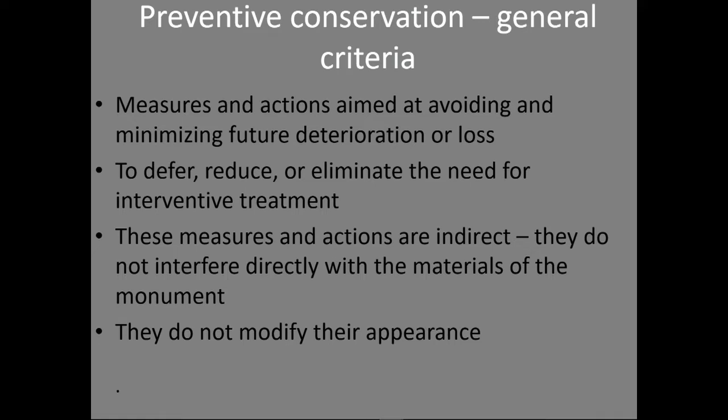As a subset of overall conservation, we also have preventive conservation. What are the main general criteria for it? We can summarize this as measures and actions aimed at avoiding and minimizing future deterioration or loss, to defer, reduce, or eliminate the need for interventive treatment. These measures and actions are indirect - they don't set out to interfere directly with the materials of the monument, and they're not meant to modify their appearance, but we'll talk about that in due course.

There's a lot of preventive conservation in museums, but if we take it outside to an external monument, it seems to me there are 2 main things we're requiring of preventive conservation: preventing the ingress of moisture or the formation of salts, both of which can be potentially damaging and may be interlinked, or modifying or controlling the environment of the monument to mitigate the causes of decay. So we're now narrowing it down to just these couple of issues.

Preventive conservation is understood to be carried out without intervening with the stone itself, right? So the control can be considered as reversible, although the effect on the stone may not be.

Giorgio Torraca, the much missed Giorgio Torraca, in his lectures on porous building materials, said that any consideration of protection should always start with reference to those parts - roof, gutters, downpipes, cornices, windowsills, flashings, projecting elements, damp-proof membranes, drains - that were designed to protect against water and which may not be functioning properly because of their own deterioration or defective design. Giorgio wrote a lot of common sense, and this is one of the best paragraphs he wrote, in my opinion, because it's so important.

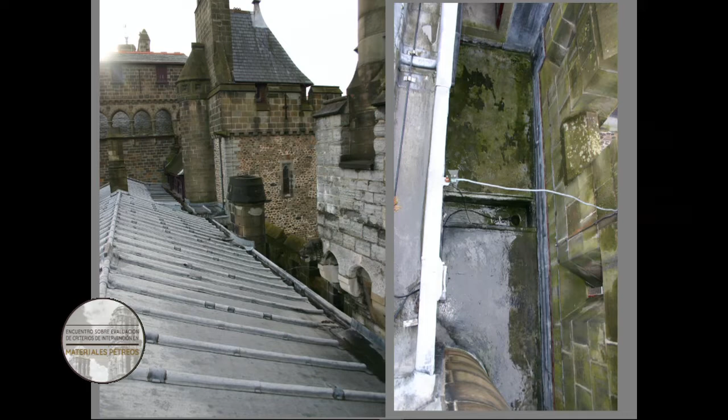This is Cardiff Castle in Wales, with massive expanses of lead roofs. That's fine, and you think that's all terrific. But when you realize that every single piece of roof you can see, including all this up here, is all draining into one gutter here.

Not surprisingly, it's coming out of this spout, and when it rains there's rather a lot of water coming out. Its control is non-existent, and it will splash over the masonry. It gets in through the window, through the flashing, and it's running down the wall.

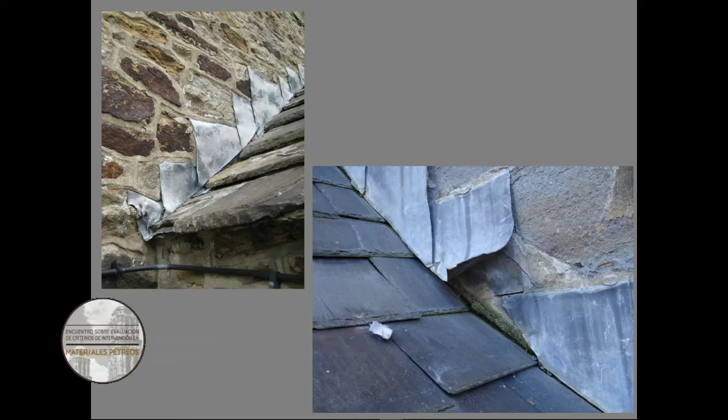So the management of rainwater has got as far as the roof being efficient, but the next step is no longer working. We have lead flashings, which try to protect the interface between a roof and a piece of masonry. Self-evidently, that's a weakness in any system, but we need to make sure it's working effectively.

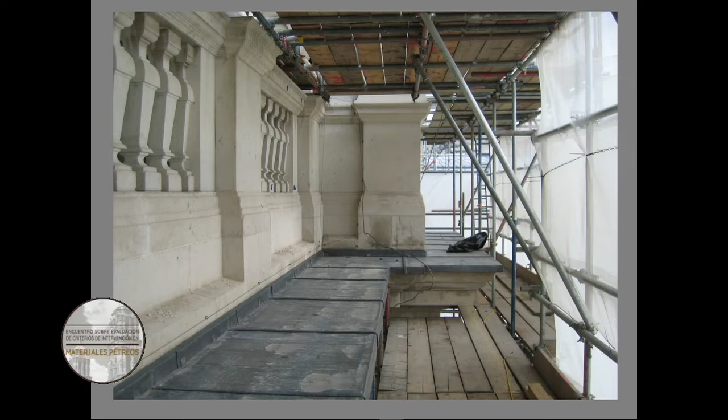And cornices, which are designed as weatherings, are designed to protect the stone beneath and throw water clear. In that design, they basically rely on a little throat normally underneath which throws the water clear. The moment that erodes or doesn't work properly, the water will just track back onto the stone. So we introduce protection of cornices like this.

That's fine until somebody puts a ladder against it to put up the Christmas decorations, and you can see that's pushed the lead back against the stone, and now the water is beginning to track down the cornice.

So these are just some of the issues you see in terms of these things that Torraca talked about. We have

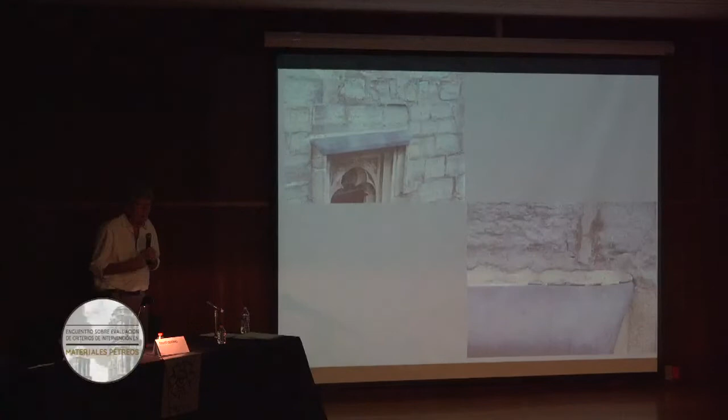windows with pointing between lead and stone. Very difficult, they have very different thermal characteristics. Lead expands a lot when heated, stone doesn't, not much anyway. So any mortars there will crack, and the moment you have a crack, capillary action means the water will start to come in.

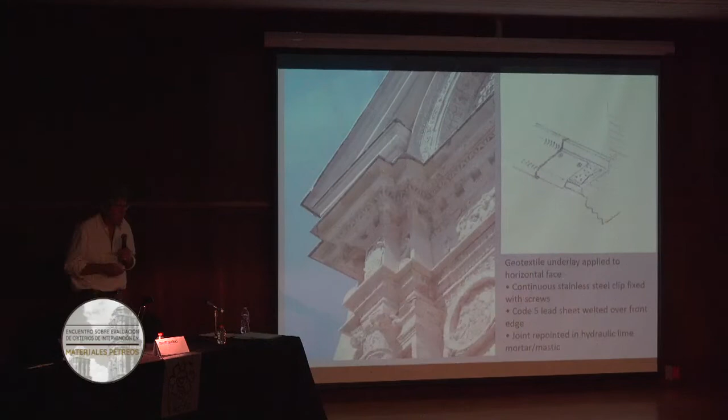And a cornice protection to cornice can also, of course, be an effective repair strategy for failing stonework.

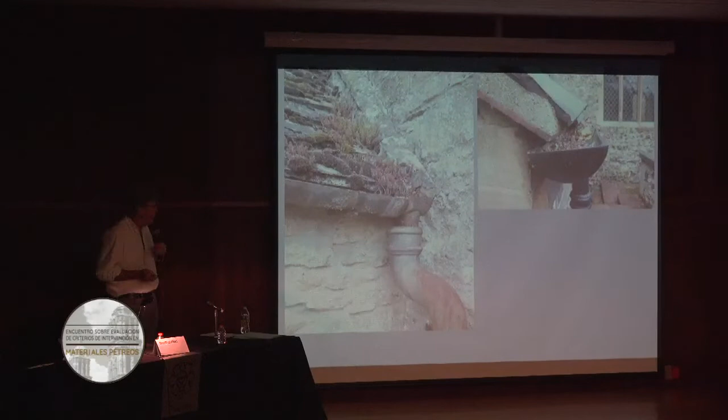Again, wherever you go, you will see things blocking it, from dead birds to vegetation to all sorts. This is my favorite: the water comes down here, somehow it's meant to leak from there into that gutter, down there, and then down there. It's no surprise that doesn't work very well.

This is on a very important church. How did we get there? How did it possibly happen that we could construct something so complex and useless?

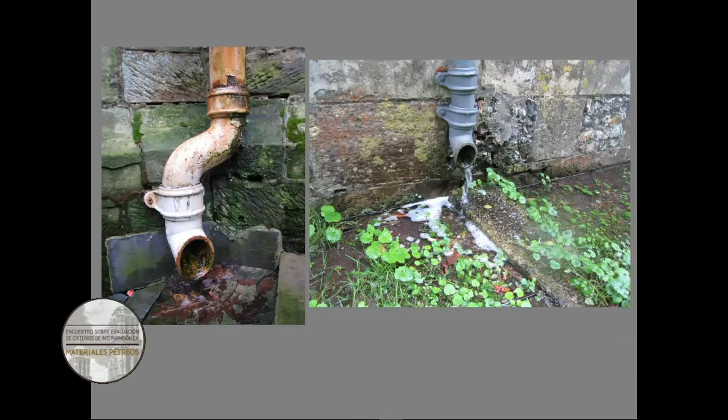When we get water down to the bottom, we want to dispose of it in an organized way, so we want it to go into a nice drain. Unfortunately, the water falls well away from the channel, so it just seeps back into the wall, and on the inside you start to see the results of water not being properly channeled, and you get salts, and then deterioration, and so on.

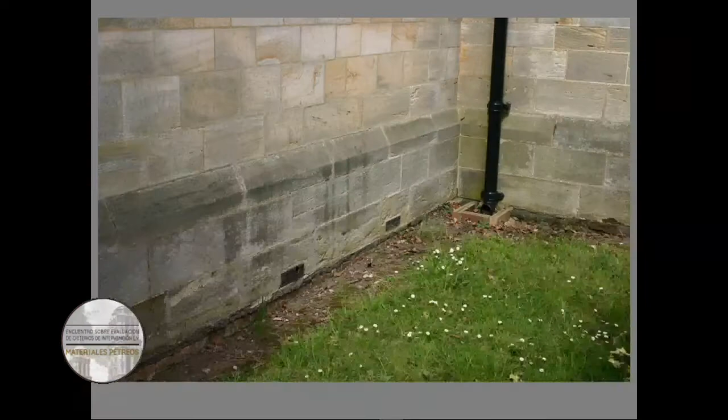This whole scheme happens, and it's all because of something so simple which we could put right. This is actually a very early example - there is a slate damp-proof membrane installed in the 19th century there.

So if you've got damp-proof membranes, they need to work, but they probably don't need to be within 20 millimeters of the surface of the stone, because water will splash above them. All of these things feel so simple, but it's really effective conservation, and we shouldn't be too proud to actually be looking at these things.

Because then when we get salts, we get the problems we all know about. It was good to hear Claudia's description of the problem of salts - they're everywhere. Wherever you go, and poor old Venice again - I'm sorry to keep harping on about Venice, but I want to cry about what's been happening.

Anyway, we've tried to reduce the moisture, we're trying to control the moisture. We can't stop it raining, but we've got to ensure that existing measures are working properly. It's really simple, but it's so important.

So we could reach for additional protective measures, perhaps shelters. When I say managing the external environment, I don't mean that we're controlling the rainfall. What we're doing is things like - trees can affect things, as we showed with the War Memorial earlier, which went green very quickly because of trees above it. Or indirect rainfall, where, as with Cardiff Castle, water is coming from one place and affecting something else.

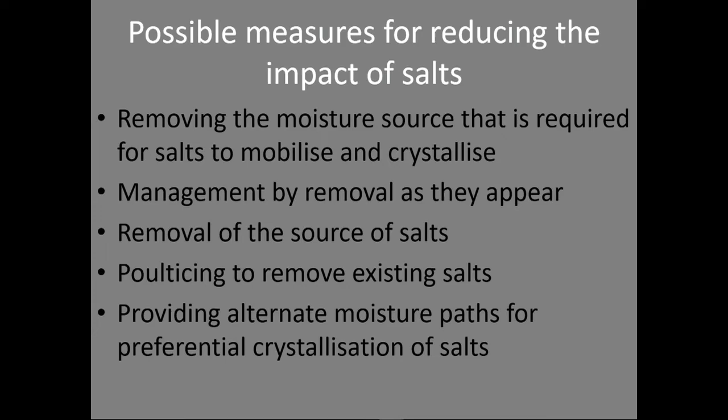So now they have a process where every few weeks they go around and remove the salts from the surface. Removal of the source of salts - quite difficult, but possible. Poulticing to remove existing salts, and providing alternate moisture paths for preferential crystallization of salts. We'll see some examples of all that.

So how do we assess these things and how well they've worked? These are the questions we should be asking - how do we assess it? What criteria are we using to see if it's been successful or not? We'll have a look at that in a minute.

Do we do enough to understand how any change will affect the equilibrium the monument has with its environment? Because everything is about that equilibrium that exists. And can we ensure that the fundamental concept of 'do no harm' is not being compromised? I have examples of shelters designed and constructed for the best possible reasons, but they've actually led to more problems than the ones they've saved.

So each monument is distinct, and there's no consensus really as to what parameters should be used to measure success, as we like to call it.

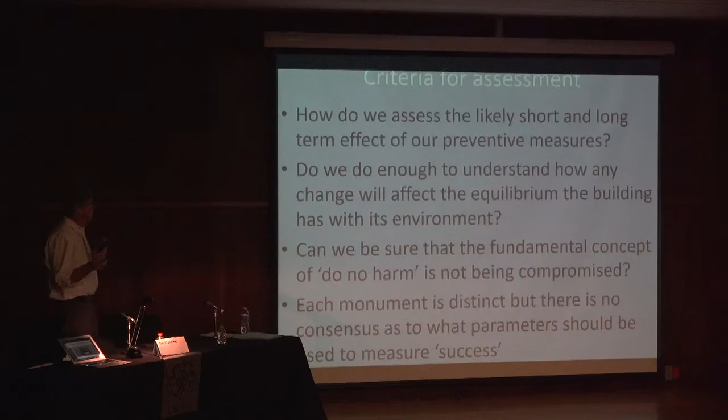So just a few pictures of shelters I've come across over the years. This is in Sri Lanka, and there's actually a painting on the inside of this wall. This is a shelter, and I thought, well, actually that's pretty good, really - it allows the wind through, protects it from the rain, and doesn't make an enclosed space too much. I have no idea whether it works or not, but I took the picture.

This is in Ostia Antica in Rome, where the shelter that's been put up here has clearly contributed to this level of salts. I don't know what it was like before the shelter, but it's certainly no better now, and they've got a salt problem.

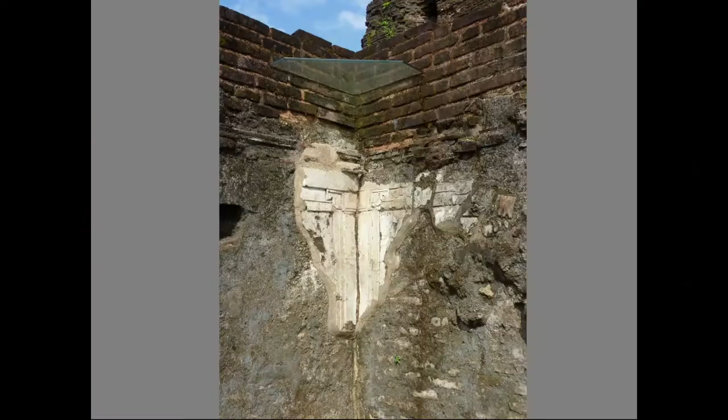This is a good shelter. This little bit of glass up here is to protect that little bit of plaster. I'm sure it's terribly effective, but again, I don't know how you possibly measure whether that's doing any good or not. And then you have the enormous shelter over a Buddha, again in Sri Lanka.

And again, probably protecting it from direct rainfall, which we hope is beneficial. But maybe it's been used to being wet, and now it's dry. What are the implications of that?

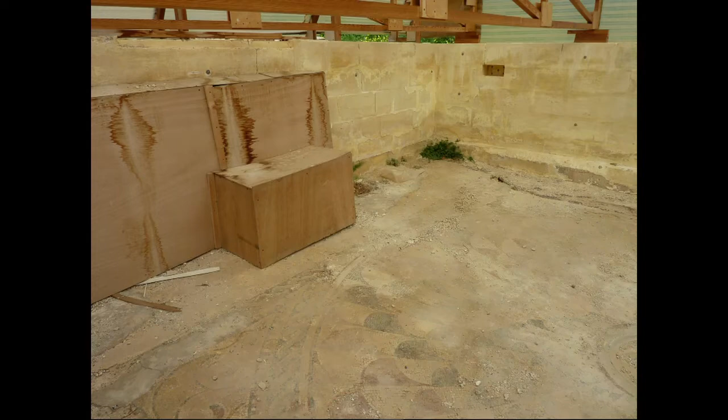So they protected it not only with the plastic, but also with boxes on top. It's no surprise that, this is with the boxes removed, you have these sort of little benches and stuff. They are failing catastrophically from salts, because you've got groundwater and a very hot environment. So groundwater is just being soaked up into them and bringing with it salts. And that's just a close-up of that.

So now let's look at some of these examples. We have the Roman bathhouse in London. For each one, I'll give a very brief history and hope that you can picture a bit what it's like. So this is a 3rd century house that was excavated in 1848. It consists of stone and tile walls with pilae and tesserae.

The River Thames is less than 50 meters away, so groundwater levels vary very considerably. It suffers from significant salt crystallization, especially in the porous materials like the tiles. And it's set within a basement of an office block.

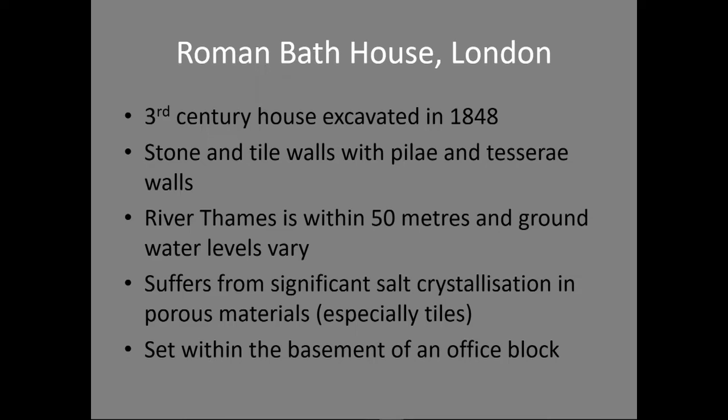Now, this office block has been refurbished twice in the last 40 years, and each time the whole site is buried in order to protect it, and then it's re-excavated. Perhaps they should have just left it buried.

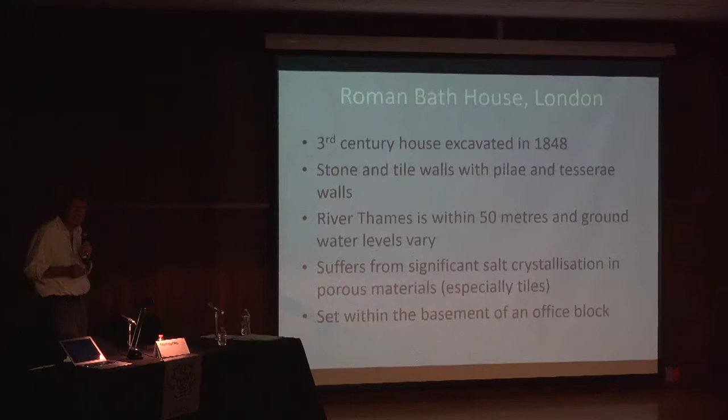Anyway, so that's basically it. It's very typical, with a tepidarium, a frigidarium, a caldarium, and various other rooms. It's not very grand, but it's quite interesting. So I thought I had some pictures, and maybe, oh yes, I do. Okay, so

Before we see the pictures, the various options we had a look at were reburial, right? If you've got this stuff that is exposed and has this water moisture, you cannot possibly isolate it all from the floor. We talked about trying to monitor and control the environment, but it's a big space. And also you've got vents that go straight out onto the pavement level, so the humidity when it rains is massive, goes way up. Poulticing was impossible except on some of the pilae and some parts of the tesserae, which were isolated using lead.

But how we actually ended up doing it was we put sacrificial mortars applied around the areas of Roman plaster, and this crushed limestone sand used over all the areas of the site surrounding above ground archaeology. So that will make more sense when you see some of the pictures.

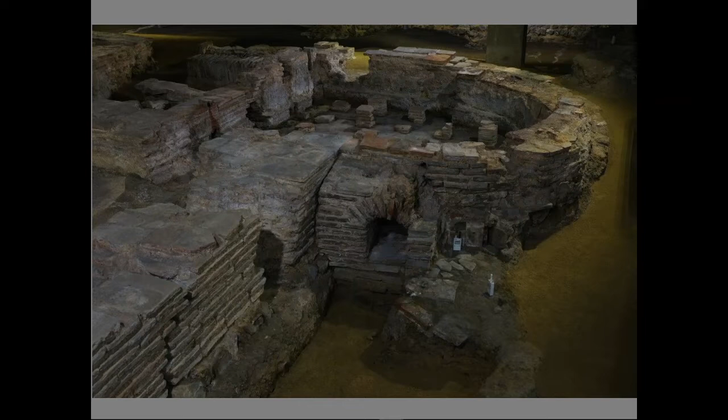So we have here some of the pilae, which used to support the floor with the steam coming in underneath. These are the things that were suffering badly. We were able to lift those and lay them back onto lead membranes.

And that's another part of the bathhouse. Again, we were able to lift all these and reset the tiles. But what you can see around here is this crushed limestone, okay? And that's a very porous material. It's designed for moisture to come up preferentially through that material.

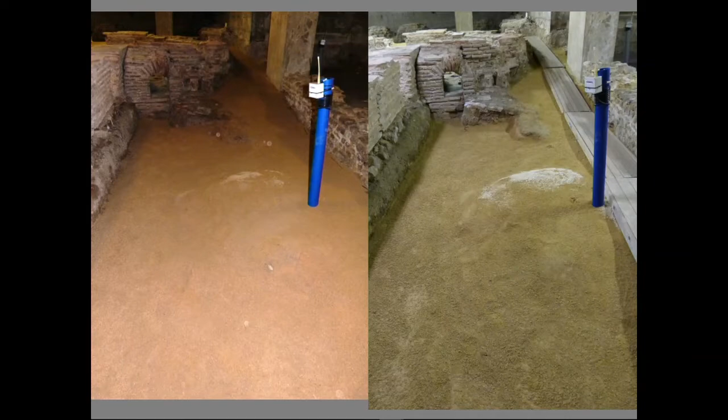And you can see here, actually, this area of tesserae has been lifted. We rolled it up and relaid it on a lead tray to isolate it. And here you see how the salts appear. You can see this is a thing to monitor the groundwater level. But you can see salts appearing, and then there's many more salts.

So we have sort of achieved quite a lot. And there you can see that we use different colors as well to help show which areas were part of internal rooms and which parts were exterior. So there's an interpretation board that explains all of this.

So if we look at a summary evaluation of that particular project, it's open to the public, which is, I guess, welcome, because otherwise it was just lost in a basement.

Groundwater levels, we can't do anything about those. The River Thames will flow. Salt levels are still high. We haven't been able to do anything about the salt levels.

But what we can do is take the top layer of sand, the top 50 millimeters, and it's scraped off and removed every 5 years and replaced with less salt-rich sand. There is a small amount of continuing intervention required because salts are present in the walls. We can't get rid of them.

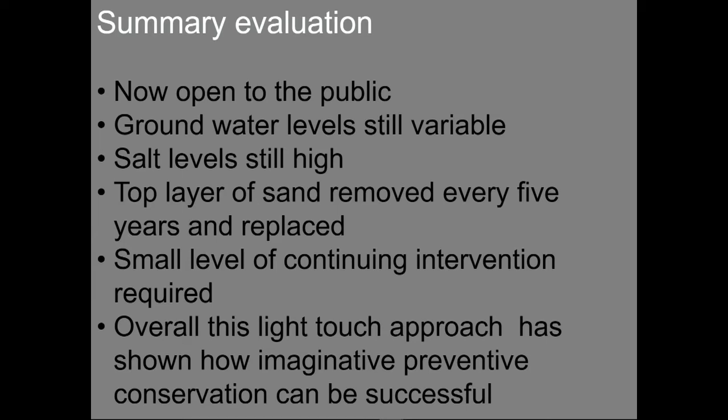So I wanted to put this in because it's a very light touch, but what we've done is we've looked at the problem and realized there's a good preventive measure, which is putting the porous sand around the material in order to get a preferential path for moisture. I think that's better than trying to poultice, because you have a vast vat of salts that would be endless.

So the second one I want to look at is Rochester Castle, a 12th century keep constructed from local ragstone and mortars made from lime, sea sand and crushed shell. So bear that in mind. And originally the exterior was rendered.

This is a massive building, absolutely enormous. I ought to have put a scale against it, but anyway, a brief history: besieged by King John in 1215, resulting in the destruction of the southwest corner, repairs in the 14th century, but a ruin since 1600.

Then it was passed into the Weldon family. They wanted to demolish it in 1738 - that would have been a contract and a half, lots of spare stone there. The council then took on the lease. Repairs were carried out in 1883, major repairs in 1897, and these various things were carried out.

And that's a view down from the top, looking downwards, and it goes down 5 floors. There are no floors left, no roof. It's just a massive, massive structure. Interestingly, no one has been on this for a long time, but it has developed its own sort of soft capping, a protective capping of grass.

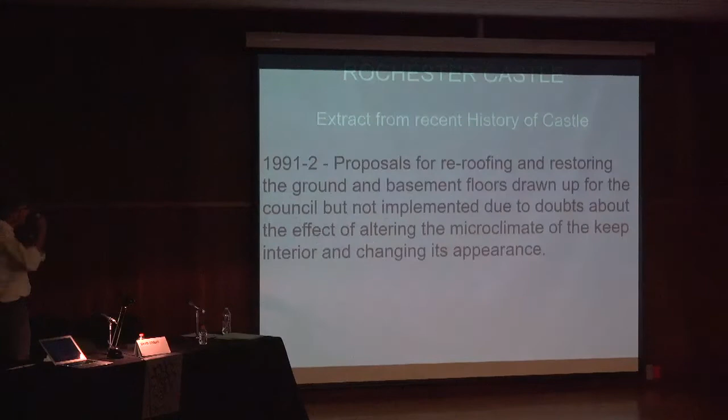In recent history, 1991, proposals for re-roofing and restoring the ground and basement floors were drawn up, but not implemented - wisely, due to doubts about the effect of altering the microclimate of the keep interior and changing its appearance. Because by now, Rochester Castle means no floors, no roof. It has those heritage values, and obviously to put them all back and then try to hold weddings or whatever in them would not really be complementary to those values.

So if only they'd read that, but they didn't, because later on, in 2004, the poor state of the walls was an ongoing problem, urgently requiring resolution. Severe winter conditions are likely to cause accelerated deterioration. While the monument lacks its roof, the walls are receiving double the amount of weather they were designed for.

So they proposed, as preventive conservation measures, that the tops of the walls should be permanently covered with a parapet coping, rainwater pipes should be provided to discharge the water, and a main roof added to the castle keep to protect it from rainfall. So you'd have a roof and a drainage system, and all would be well. But of course it wouldn't be.

So there have been a number of previous interventions, some with cement pointing. There is some continued deterioration of the original mortar on the external and internal walls - not surprising, because they're built of sea sand and shells, so very high chloride levels. Rainwater falls on top of the walls and then runs down the walls or between cracks in the paving and into hollow areas and vaults within the walls. So it's not a place you go and have a picnic when it's raining, because you might get wet.

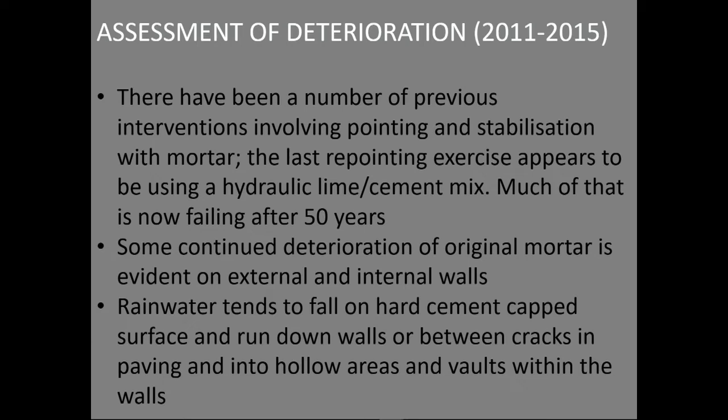So, internal salt decay: we did nearly 3 years of monitoring, and we collected a total of 10 kilos of material, which equates to 0.01 cubic meters of mortar. This was one of the reasons why they wanted to put a roof on, because they felt they were losing too much. So at that rate, over 3 years, it's lost 0.01 cubic meter. I reckon there's 500 cubic meters of mortar in that thing, so I think that works out at something like 150,000 years before all the mortar has deteriorated.

But of course, that's not a serious comment - the deterioration is very slow, very gradual. And we really shouldn't be surprised, that's how stone and mortars decay, in a very gradual way. They will eventually reach a point where maybe there will be catastrophic loss, but we're certainly not there yet. So for the moment, let's not bother doing anything that would compromise the current situation.

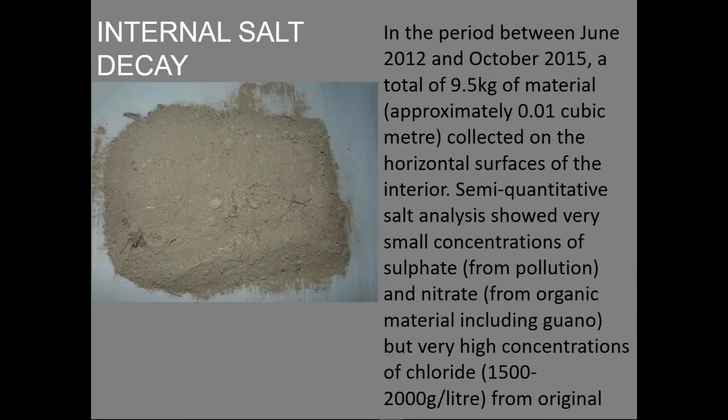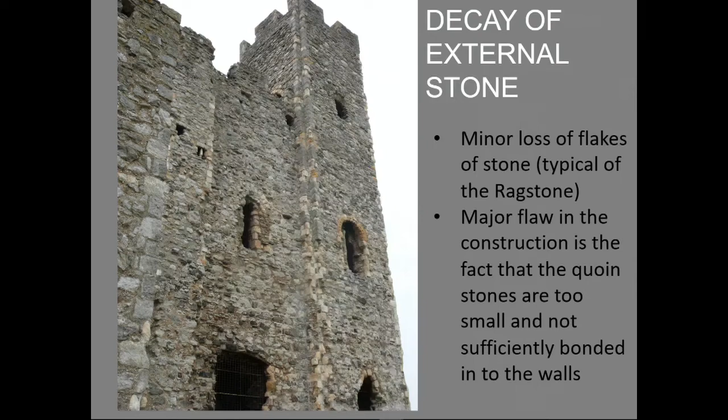So there's lots of chlorides, as I said. On the external stonework, there's minor loss of flakes of stone, which is very typical of the stone it's made from. The original construction has these very small quoin stones, made of stone from Caen in Normandy, France, and massive ragstones - those are particularly vulnerable. We did a lot of environmental monitoring, including here you've got absolute humidity and dew point.

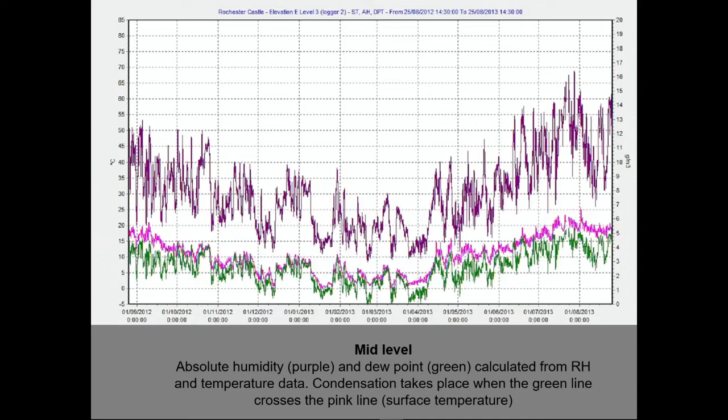So when the green and the pink at the bottom cross, you get condensation. One's from mid-level, one's from low level, and if you swap, you can see there's different condensation rates happening between the two.

We were also fortunate enough to have a photographic archive from 102 years before, very early photographic material, from 1906.

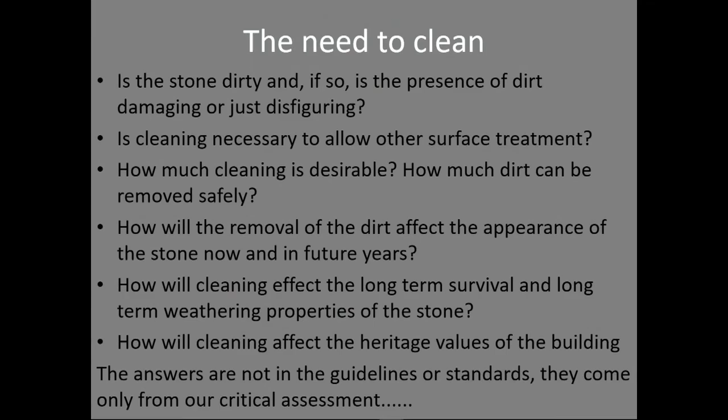Part of the reason the project had been proposed was the thought that there had been... oh Christ, what have I done now? Help. Okay, sorry, I'll just flip through these and hope to find it.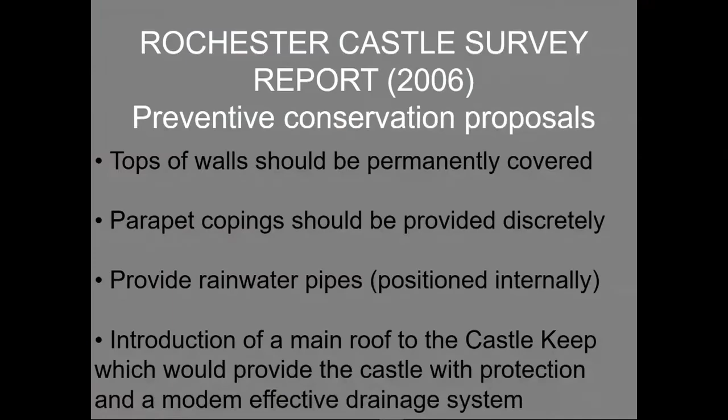Nearly there. One of the reasons was that they thought there had been significant decay of particularly these columns, and we compared the old photograph with the new photograph and found almost no change. It was a perception that there was deterioration happening.

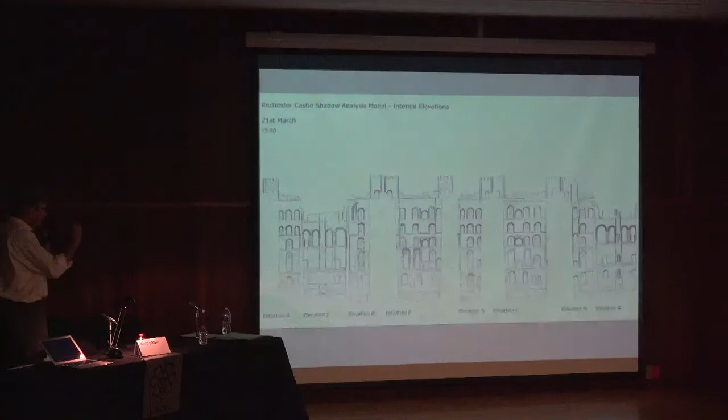We plotted how the sun falls on the walls to see how that works. This is some of the original render on the exterior.

So we basically ended up saying, don't do anything. Please, please do not put a roof on this, because by putting a roof on it, you're going to change all those stable, semi-stable environments inside. You're going to start drying out the floors and the walls, and you're going to have potentially very damaging, perhaps not catastrophic, but very damaging results.

And it saved £2 million. So I think that's a pretty good deal, frankly.

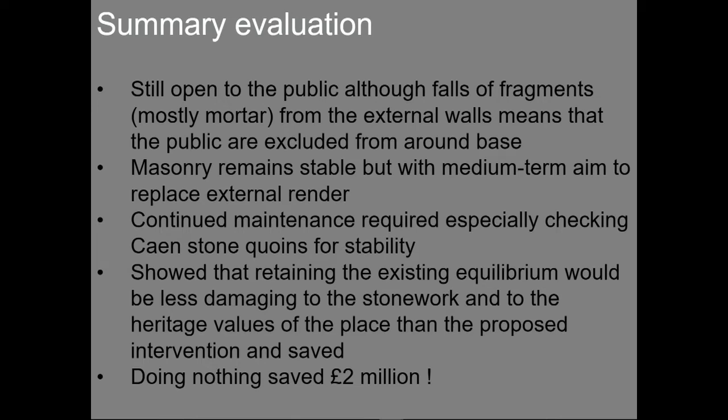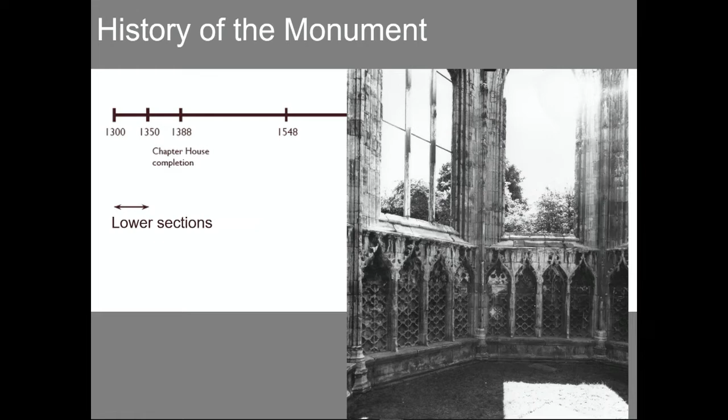So the third one is Howden Minster, which is up in the north of England. Again, a brief timeline: constructed in 1300 to 1350, with the lower sections and then the upper sections a bit later. The Reformation in 1548...

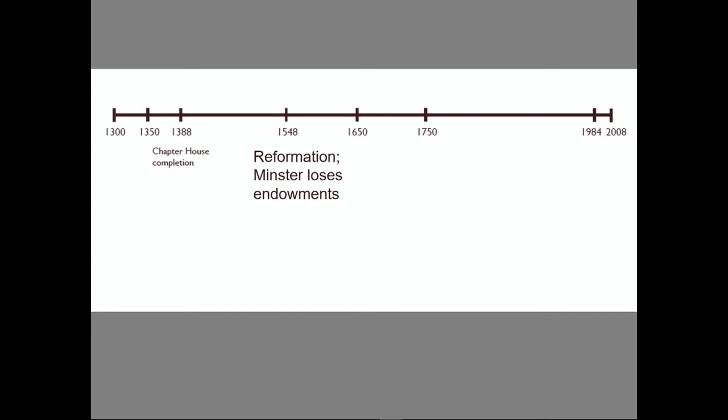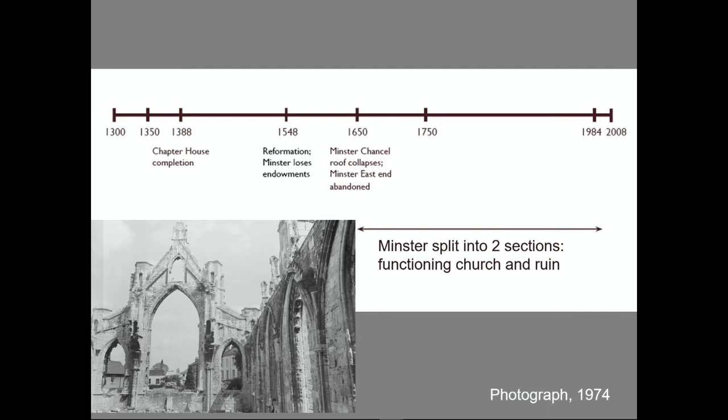...lost its endowments and basically became pretty derelict. Then the roof collapsed in 1650, so it was abandoned, and it was split into 2 sections: a functioning church and a ruin. It hasn't had a happy history - the roof and windows were then destroyed in a fire.

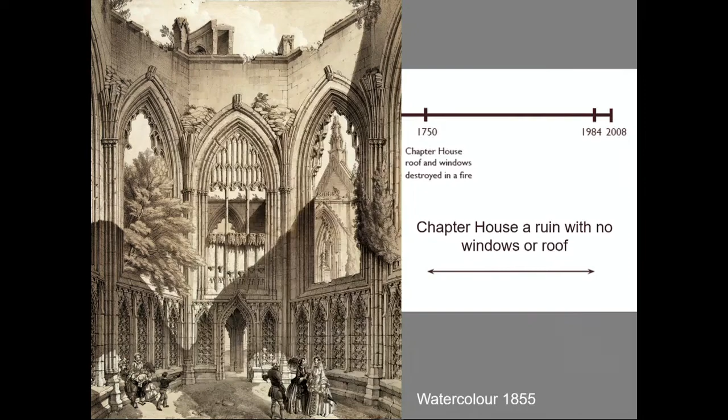It then spent 234 years as a ruin without a roof. Then in 1984, it was taken into the guardianship of English Heritage.

They decided that in order to make it a place where people could go and visit, it would be a good idea to put a roof on as a preventive measure and to improve the environment. It actually turned out to be a catastrophic failure.

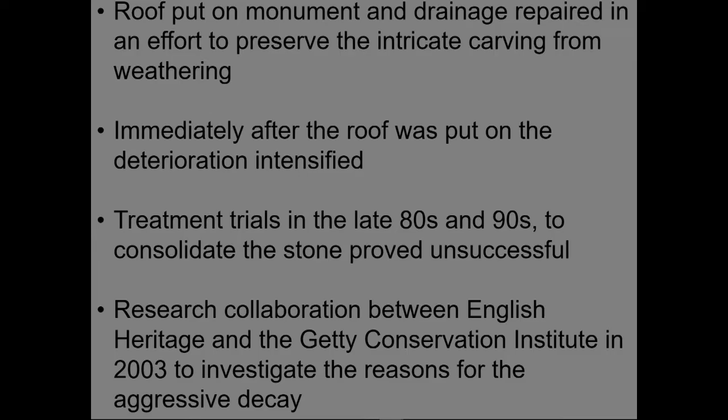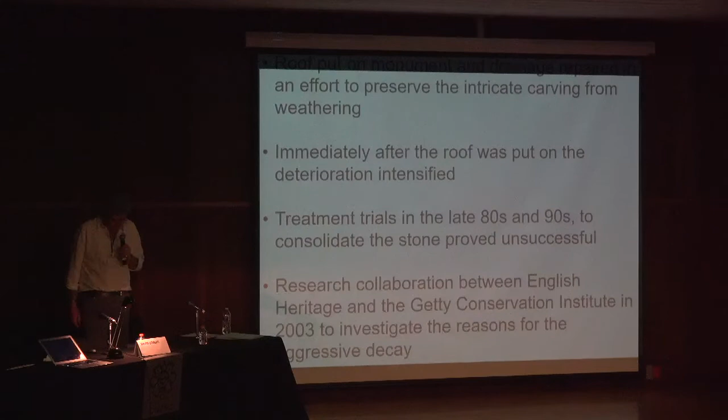So a roof was put on the monument and the drainage was improved in an effort to preserve the intricate carving from weathering. Immediately after the roof was put on, the deterioration of the interior intensified considerably. Then there were treatment trials to consolidate it, and they proved unsuccessful.

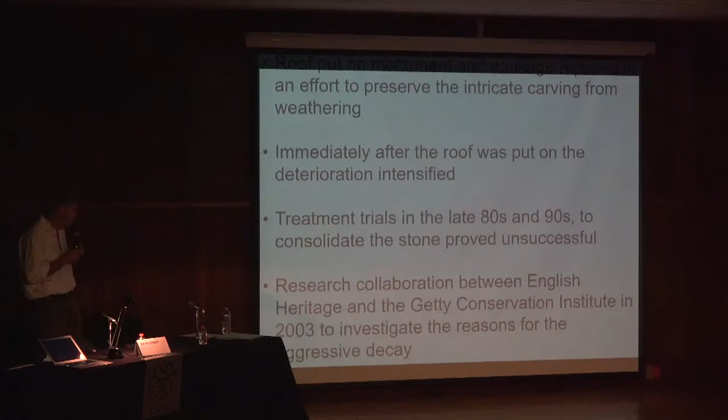So a research collaboration was set up between English Heritage and the Getty Conservation Institute, which I was involved with, to investigate the reasons for this very damaging deterioration. This is the sort of thing that was happening - you can see the surface just collapsing repeatedly, and once one bit has fallen away, the next bit falls away.

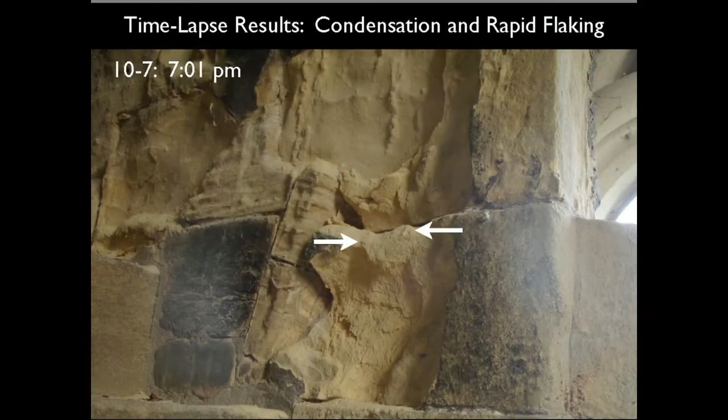Time-lapse photography was set up - it's a pretty boring watch actually, to watch through a whole year of time-lapse film trying to spot when the flake falls off. What we were trying to do was see if there was some change in environment that triggered the loss of material. Without success, it has to be said.

But here you have the very decorative interior. This is the area that started showing the catastrophic decay, and you can see that's the area of loss - in 4 years it was lost.

Then you do decay mapping - there are 8 faces like this, it's an octagonal structure. And you do a decay mapping, and you can see, unsurprisingly, there's a lot of biological growth, which is the green at the bottom because it's constantly saturated, and you've got salt efflorescence, which is going in a slight path rising upwards.

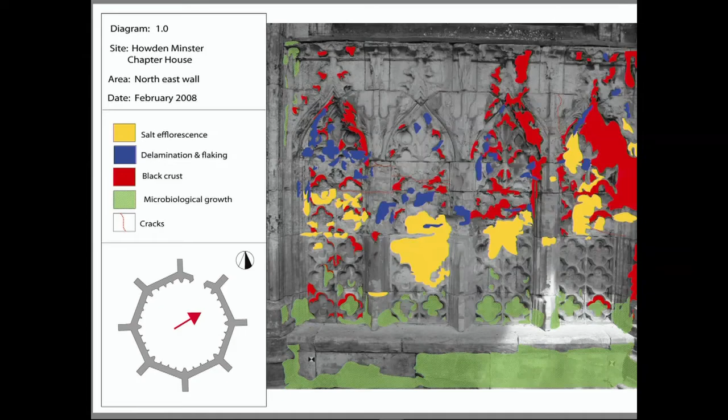So you can look at that and try to work out what on earth is happening, because at this stage we're thinking, why has this happened, what's the problem? Because externally, the stone is fantastic. It's in really good condition. So there's certainly something weird going on.

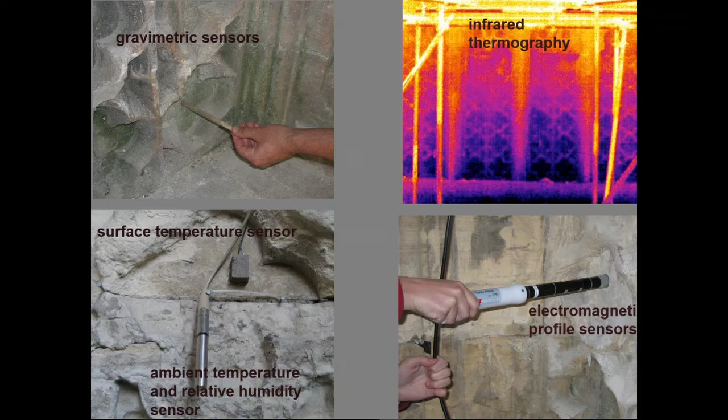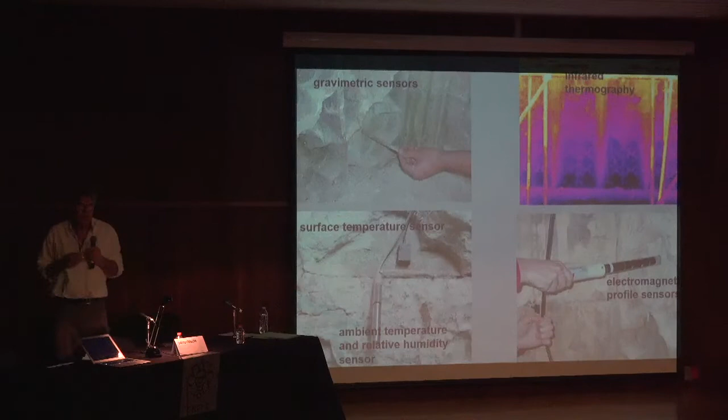We did a lot of investigation with infrared thermography, gravimetric sensors, surface temperature sensors, ambient temperature, electromagnetic profile sensors, all of these things to try to work out what was happening. And the annoying thing is that the answer was staring us in the face the whole time.

So we looked at the salt mixture, and it's calcium sulfate, sodium chloride, sodium nitrate, but mostly magnesium sulfate, because it's made of magnesian limestone. I should have said that ages ago. Accelerated weathering tests using that combination of salts showed that this brand new stone lasted 6 weeks before it collapsed.

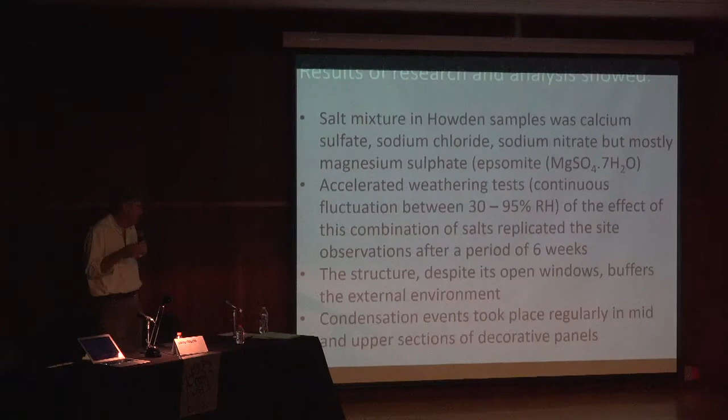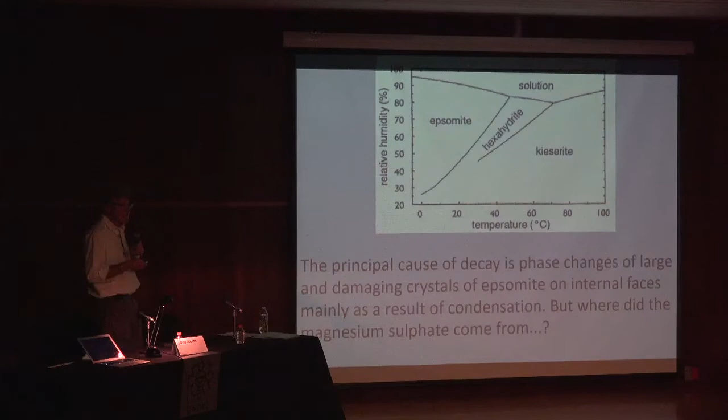We noticed that the structure, despite its open windows, buffers the external environment, so there's not the contrast. But condensation events took place regularly in the mid and upper sections of the decorative panels, which is where all the deterioration was happening. If you look at magnesium sulfate on this phase diagram, you can see the temperatures we've probably got, and it goes in and out of solution as the relative humidity changes. So this was where we were looking at the problem.

Basically what's happening is that the sulfur dioxide was landing on the surface of the stone, but in the old days, before there was a roof, it was mostly washed off by rainwater, internally and externally. There was a balance between the two—there wasn't any significant moisture movement. We put a roof on, and we immediately changed that equilibrium. What it changed was it meant that condensation could collect on the internal faces, and the sulfur dioxide reacts with the stone, which is magnesian limestone, to form magnesium sulfate. It's a simple way of expressing what's actually a very complex reaction, but essentially that's what we established.

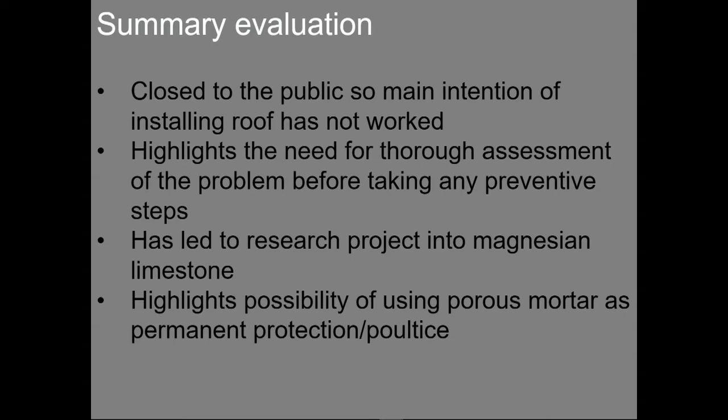What we should say is, what were we going to do about this? The only solution we tried was poulticing, which just didn't work because the surface is too friable. We tried consolidation, we tried all sorts of things. Eventually we went for a very, very porous mortar, applied almost as a render, a shaped render, so we didn't lose all the decorative material.

These are trials which are still under review, but we applied mortars, and you can see here that's the mortar, and then within a couple of years it has failed. So what we're reaching towards here is using mortar as a permanent porous poultice, if you like—that was the third attempt.

So, something done with good intentions—no one deliberately goes out there to cause damage—but done with good intentions, and actually the side effect is that we've had a much worse situation.

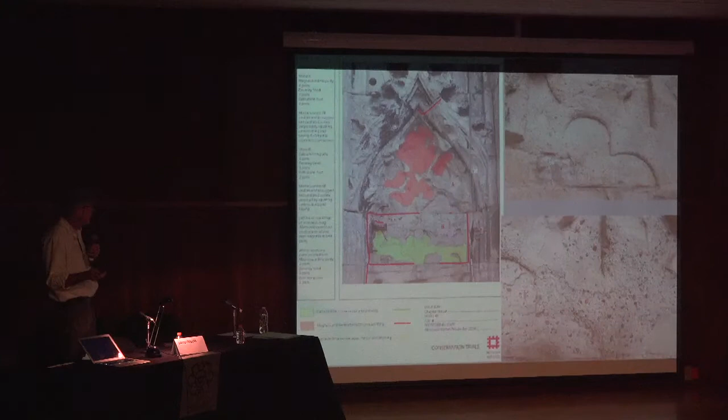So I think this is the last one, the Lalibela rock churches, which I don't know if any of you have been to in Ethiopia, which are absolutely magnificent. I was there last year, having also been there as a tourist about 10 years ago, and I was there last year representing ICCROM on a UNESCO visit.

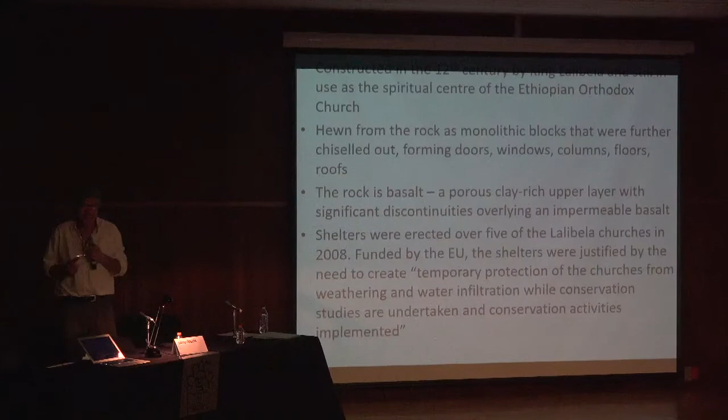I have never heard such aggression. We had a meeting the first day we were there, and 300 people turned up. There were 3 of us sitting at a desk, and 300 people out there, and they were being abusive to us, basically. Luckily, they were speaking Ethiopian, so I couldn't understand. But it was because they were fed up, absolutely fed up with specialists coming along for years and years.

So the story behind it is that they're constructed in the 12th century by King Lalibela, and they're still used as a spiritual center of the Ethiopian Orthodox Church. So it's still really important places. They're not by any means redundant.

They're hewn from the rock as a monolithic block that were then further chiseled out, forming doors, windows, columns, floors, roofs, etc. The rock is basalt, so it's a porous, clay-rich upper layer with significant discontinuities overlying an impermeable basalt. So shelters were erected over 5 of the 11 churches, funded by the EU. The shelters were justified by the need to create temporary protection of the churches from weathering and water infiltration, while conservation studies are undertaken and conservation activities implemented.

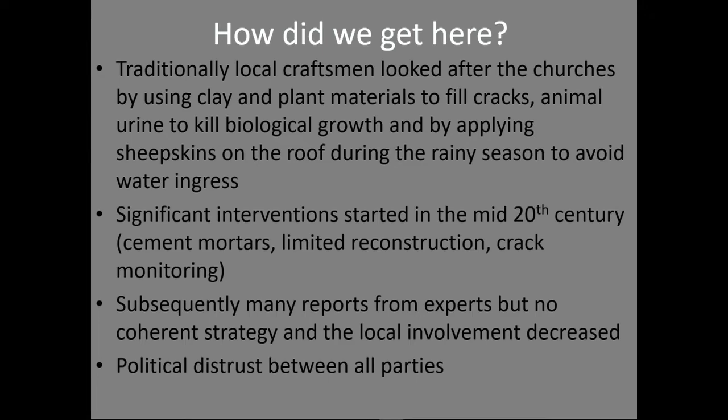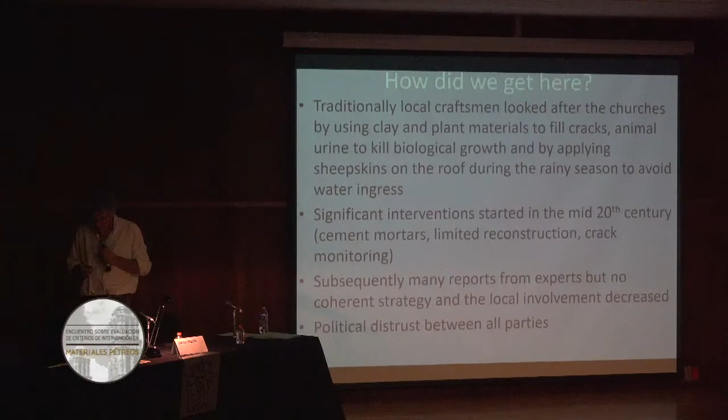But that gradually fell away, maybe because people moved out, or they just lost the will to do it, or possibly because the experts started arriving. The experts started arriving in the 1950s, and they carried out significant interventions using cement mortars, limited reconstruction, crack monitoring. But since then, there have been countless reports prepared by people about what they should do, how it should be done, and all the time local involvement decreased. As a result, there's massive political distrust between all parties. So this was why we were being abused at our meeting, because we were just another representative of the experts.

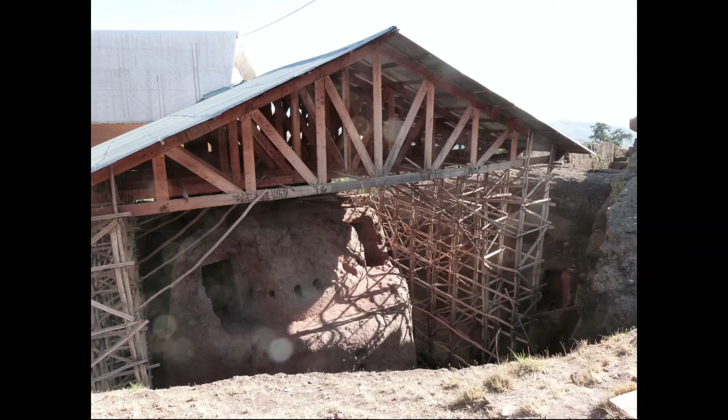So these are some old pictures from an archive of the local craftsmen filling cracks. And this was actually a traditional shelter, an earlier shelter, constructed I think in the 1950s, on a timber structure, a little bit more sympathetic. There's only one of those, and it protects a church that's in very, very poor condition.

So the problems arise because, first of all, the shelters have never been maintained. They were designed for a maximum wind speed of 40 miles an hour, and last year there were, I think, 7 occasions when it exceeded that. So the shelters started rattling, the people get alarmed, and they want to have the shelters removed. Unfortunately, because of all this mistrust, no conservation has been carried out on the protected churches since the shelters were erected—remember, that was one of the main purposes.

Meanwhile, the equilibrium has completely changed, so the clays in the rocks have completely dried out, and a lot of it is smectite. So many of the roofs are now actually crumbling, much, much worse than they ever did. 2 of the unprotected churches have been conserved under the direction of Italian conservators in 2018. And the local people are demanding the removal of the unsafe shelters immediately. So what happens? You take the shelter away straight away, and immediately what you've got is a roof that is crumbling. And the first time it rains, the clays will start to expand.

So you have a whole new equilibrium being established, and while that happens, more deterioration will happen. Our proposal was that we should concentrate on the roofs, do some conservation and repairs, then dismantle the shelters, monitor it for a year or two, and carry out any necessary works to the roofs.

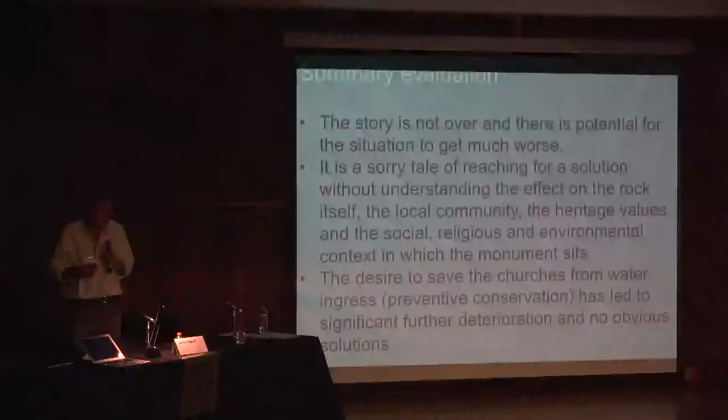That's a sorry thing to leave you with, isn't it? It's not a happy tale. I don't know—if you could do it all over again, I think you would just sort of get rid of the shelters. You would actually go in there at a very early stage and try and do some capacity building in the local people to try and revert to the traditional ways of doing things.

So this is only four slides long, but I added this late last night. These are the temples in Malta, on the coast of Malta, excavated in 1839, constructed of local bedrock and soft limestone. There's deterioration from weathering, including rainfall, increasing salt levels, and sharp thermal fluctuations, because it gets very hot in Malta. There's been some cracking of the megaliths and collapse.

So there was a review, and shelters were erected, designed to be in place for 15 years, to allow for assessment, analysis, and remedial conservation. So there you have a shelter.

Again, I know shelters are hard to make look pretty, but this is a wonderful, wild piece of coastline, and it doesn't do anything for me, particularly this one. Part of its significance, part of its heritage values, is that on Midsummer's Day at the solstice, the sun is meant to shine through a doorway and fall on an altar. Well, there's not going to be any sun shining through that doorway because it's got a shelter over the top of it. So it's compromised those values considerably.

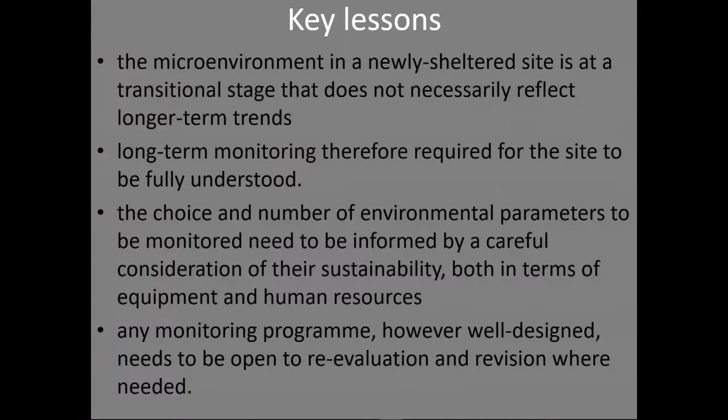But having said that, it's all been very carefully monitored, and there's a lot of work going on. I would really very strongly advise, if you're interested in this, to go and read that, because I think it's the most honest assessment I've seen for a long time about the issues—what they did, why, how it worked, how it didn't work. It's a really excellent paper, so if you're interested, definitely go and read it.

But essentially, to save you reading it, the initial results are there's been a drop in thermal fluctuations—the environmental conditions have been buffered by the shelter, as the extremes have been compressed together. There's been a reduction in wind erosion, although the wind, interestingly, is now more turbulent inside the shelter than outside it, with somewhat unknown results.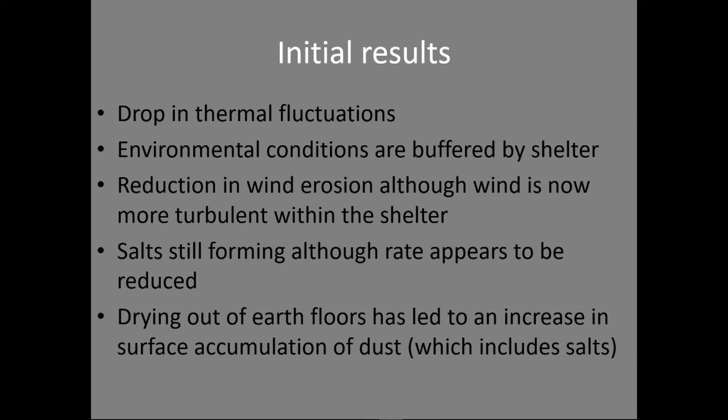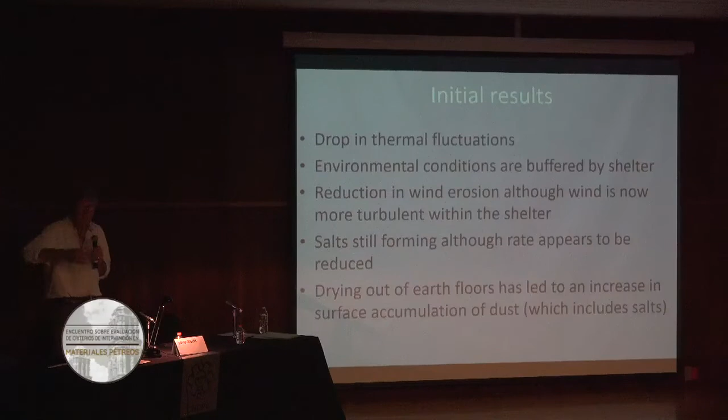Salts are still forming, although the rate appears to be reduced. But what is happening is the floors are all drying out, so you're getting a lot of dust. And a lot of salts that were in the floors are now, because there are lots of visitors, being put into becoming airborne and then settling on the horizontal surfaces.

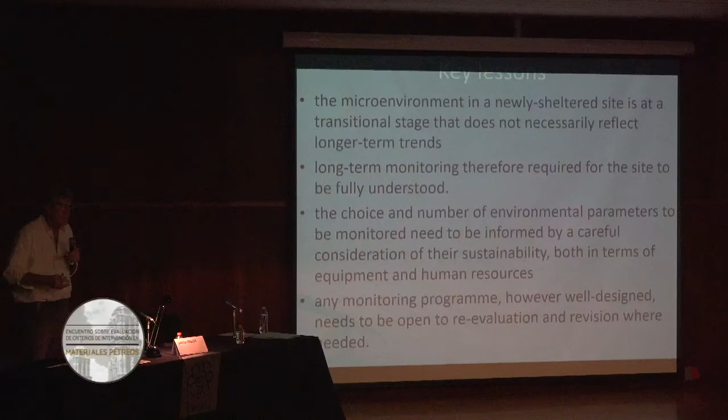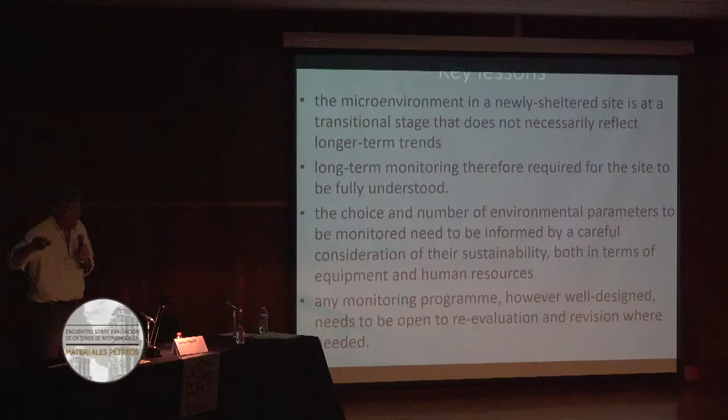So the key lessons, taken from that document, is that the microenvironment in a newly sheltered site is a transitional stage that does not necessarily reflect longer-term trends. That's really important because we're finally looking at a longer term rather than, as I was saying at coffee break, too often we do a project, look at it, maybe review it after a year, and then it goes into the archive.

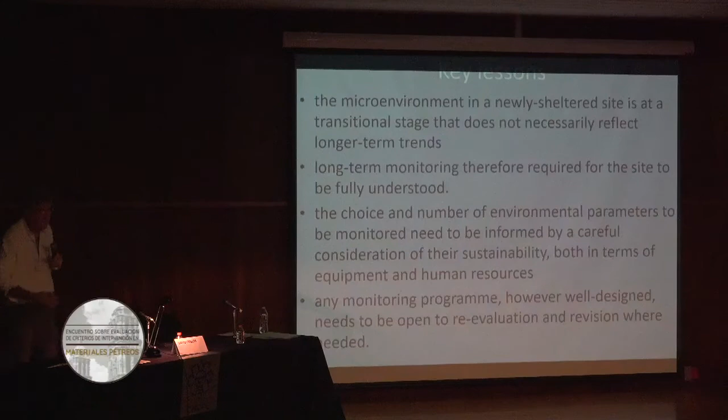And we're not good at going back and learning from what's happened. So they're saying long-term monitoring is required. The choice and number of environmental parameters to be monitored needs to be informed by careful consideration of their sustainability, both in terms of equipment and human resources. This arose because if you're monitoring loads of things, you need people to visit and download it and interpret it and all the rest of it. Maybe you're just taking data for the sake of data without knowing what you want to use the results for.

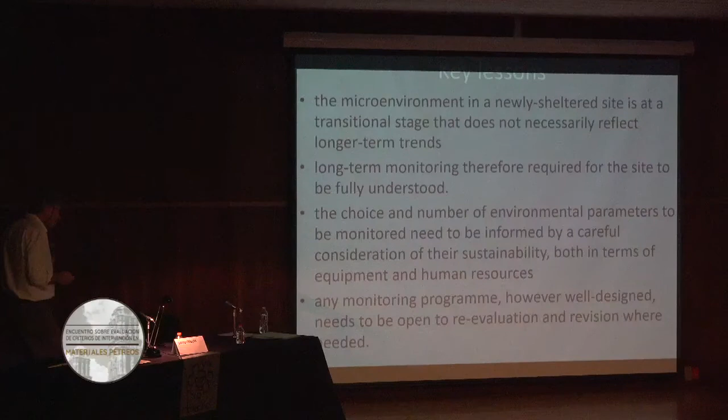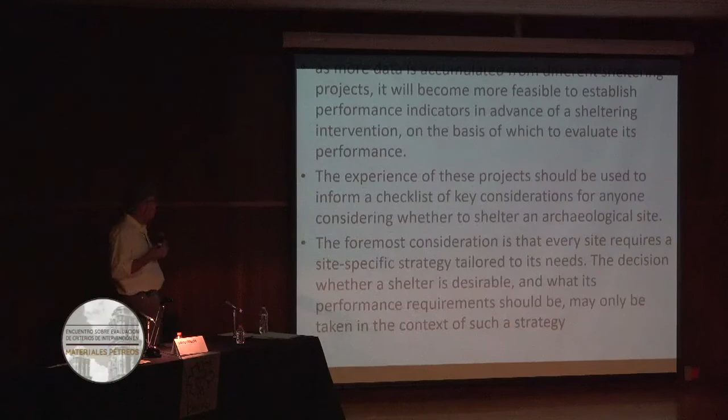So a monitoring program needs to be open to re-evaluation and revision where needed. And as more data is accumulated from different sheltering projects, it will become more feasible to establish performance indicators in advance of a sheltering intervention on the basis of which to evaluate its performance. So where we started by saying we don't know how to measure success, if we use more of these examples, we can begin to put together something that will tell us when we've been successful.

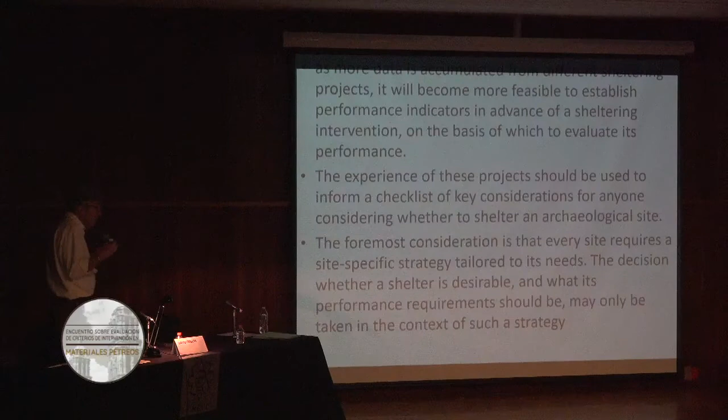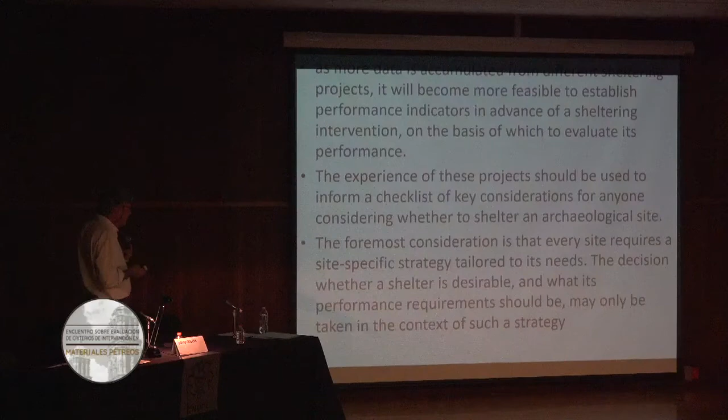The experience of these projects should be used to inform a checklist of key considerations for anyone considering whether to shelter an archaeological site. The foremost consideration is that every site requires a site-specific strategy tailored to its needs. The decision whether a shelter is desirable and what its performance requirements should be may only be taken in the context of such a strategy.

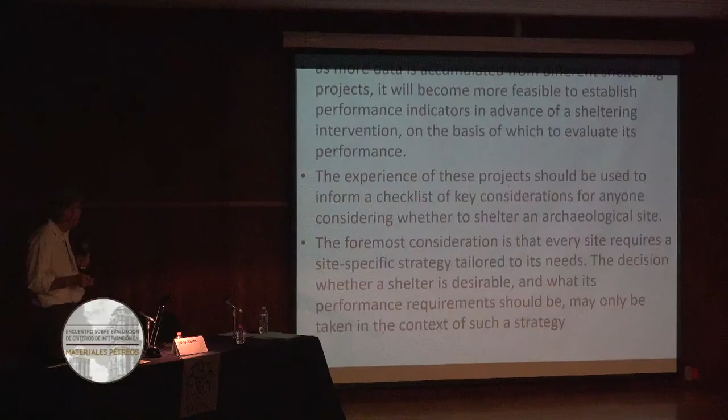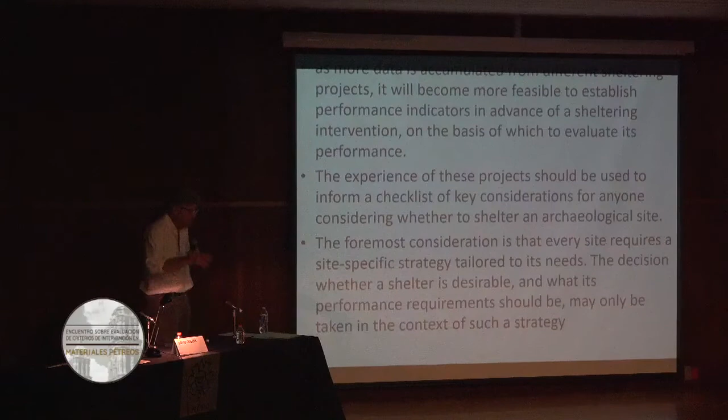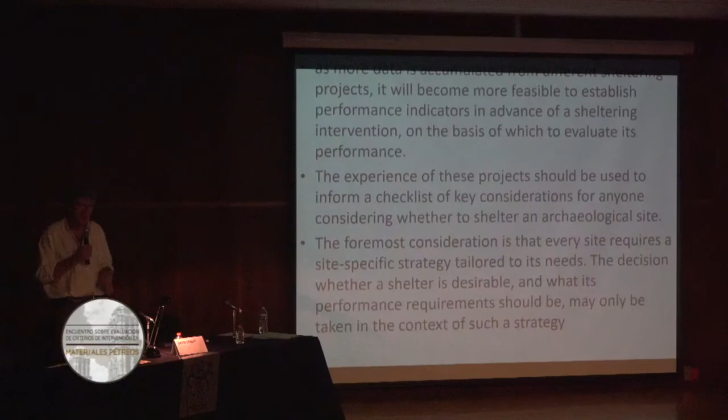I think that's it, actually. I'll finish there. It's a good place to finish because it shows us there is a way forward. But all of the examples I showed, it's about very thorough assessment, and if you don't have thorough assessment, you run the risk of potential damage, because moisture and salts are complex interactions, very hard to control, and we need to be very aware of what we're doing and why we're doing it.

Again, just like cleaning. Okay, thanks very much for your attention. I hope you can now have your lunch.

It's lunchtime, of course not. Good.

Are you going to do it in English or Spanish?